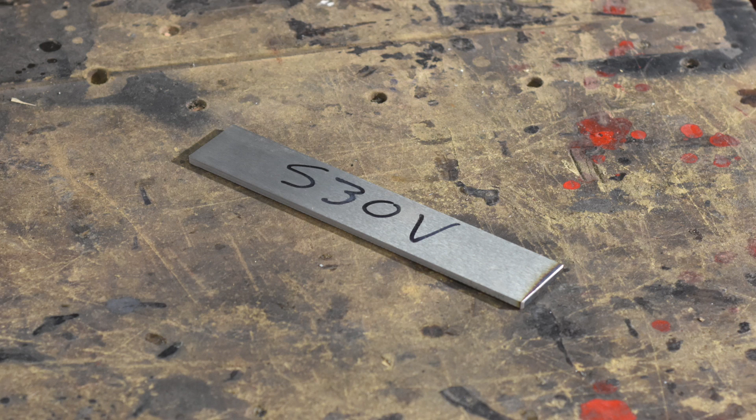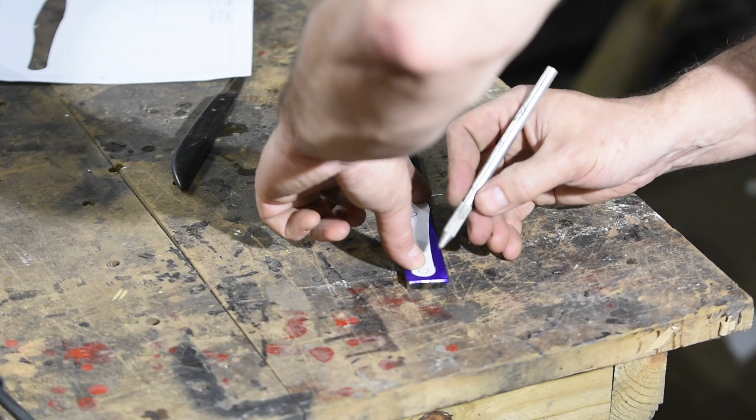For today's project, we'll be using a piece of S30V, a high-performance stainless steel. As with all three blades in this series, the blade started its life as a CAD-CAM design. Now, unlike in the other two cases where the computer design was really just used as a rough template for a handmade blade, in this case, we'll take the CAD file straight to a CNC mill. But let's start with the design itself.

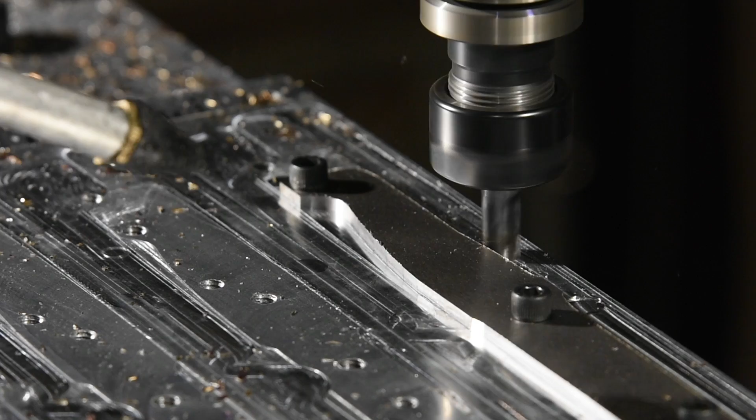I won't go through every single step, but the idea here was to use existing tooling and fixturing that I already use for my Tactics Armory knives to produce a very simple blade with a simple, easy to execute design. Now there's some nuanced aspects to various constraints and so on that I'll skip, but you'll get the basic idea by watching. I began by drawing two circles.

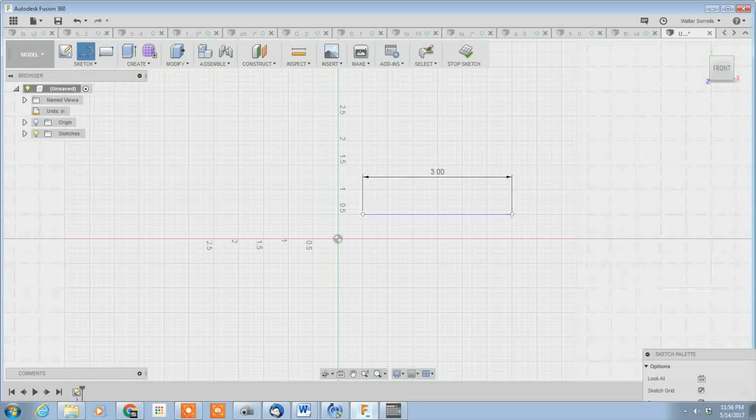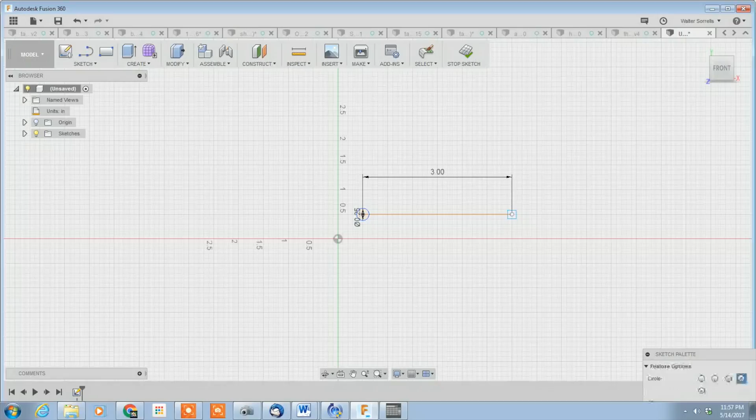There are also some dimensions and various construction lines that I tinkered with, and I won't bore you with all of that. Anyway, these two circles will ultimately be used for the clearance holes to anchor the steel to a pallet on my CNC machine using 1/4-20 screws. I know that I have two anchor points on the pallet that I'm going to be using at precisely 3-inch points, so I'll dimension them at 3 inches along a construction line.

Next, I'll make an offset from that circle to produce the butt of the knife. A couple of 3-point arcs will serve to outline the handle. Additional arcs will complete the blade itself.

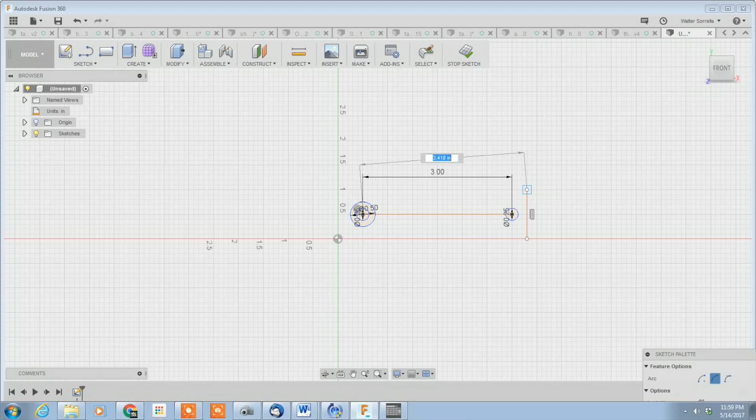For those of you who haven't worked with CNC or might be thinking about it, one of the most interesting challenges is that you're always thinking not only about the widget that you're making, but on a whole host of issues having to do with the way that it's made. How it'll be supported, how it'll be fixtured, what kinds and sizes of tools will be used, and so on.

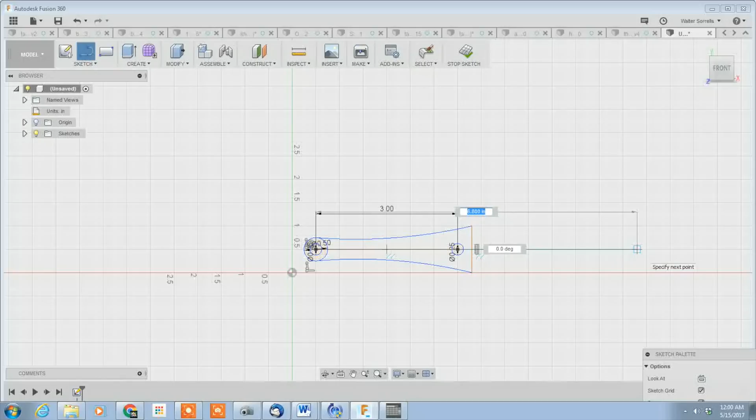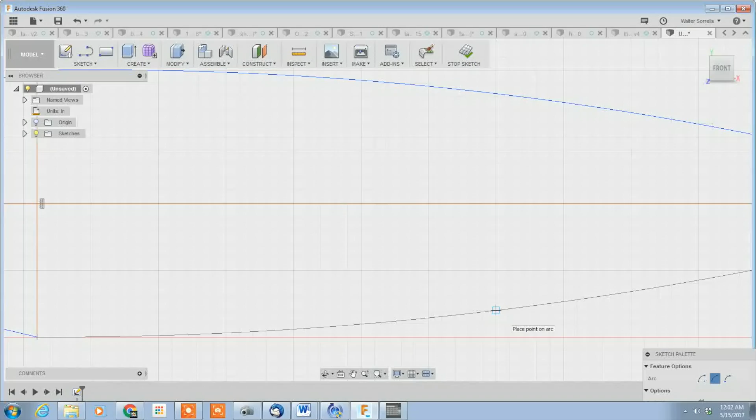Now, because the material is relatively thin on a knife blade, tool chatter is a potentially big problem, meaning that when you run tools around the steel, if it's not properly supported, the material will tend to move and vibrate. This is terrible for tools, messes up tolerances, produces poor surface finish, and so on. It's just really bad. So I want a third anchor point out near the tip to prevent chatter in the blade section.

The first two circles I've made will result in holes that are used to bolt the blade down to the pallet. But where do you put a third hole? You can't just drill right through the blade, right? Well, the answer is to make a tab. There are ways of generating tabs when you start doing the CAM, that is the manufacturing part of this process.

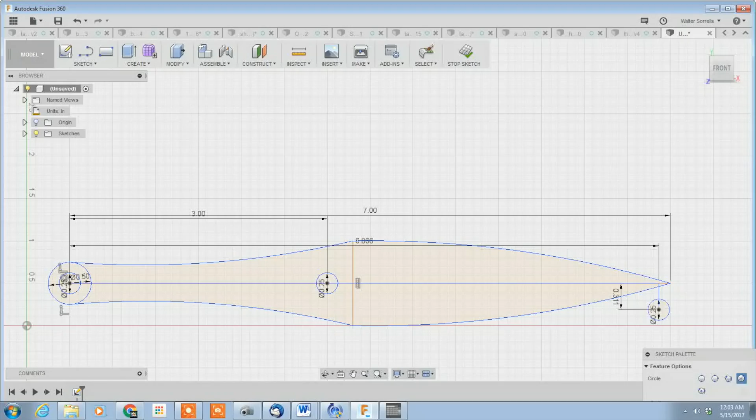But to me, the methods that are built into Fusion 360 are a little bit of a pain to use, and it's not as easy to locate precisely where that tab is going to be as it is if I just design them right into the part from the very beginning. So by just designing the tab into the knife and then grinding it away later, I can control where that tab is down to the 1/1000th of an inch and then ditch it once it's served its purpose.

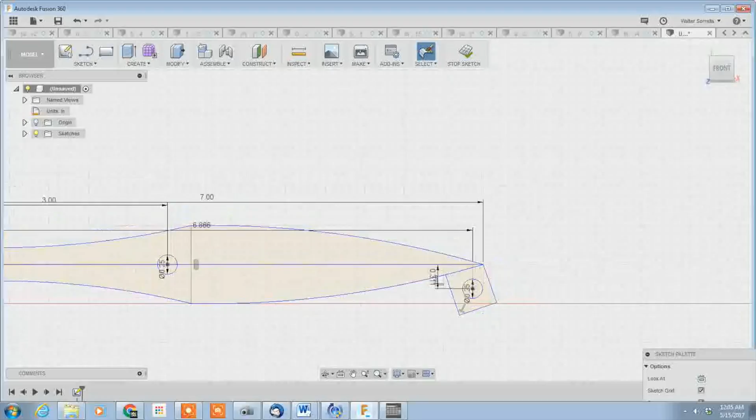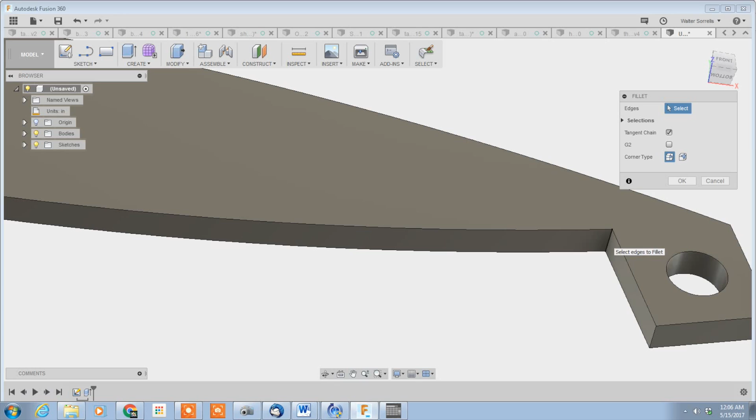Being able to locate it with a great deal of precision is important because, as I said earlier, I'm using an existing fixture that's used for one of my production knives. So the holes are already drilled and I have to adapt my knife to those holes instead of working it the other way around. See, for a one-off blade, I don't want to have to reinvent the wheel and build a bunch of time-consuming fixtures.

So like I said, I've designed the tab right into the part, using construction lines to dimension the bolt hole to the 1/1000th of an inch so that it lies exactly on the knife where it'll be on the pallet that I'm going to screw it down to on the CNC machine.

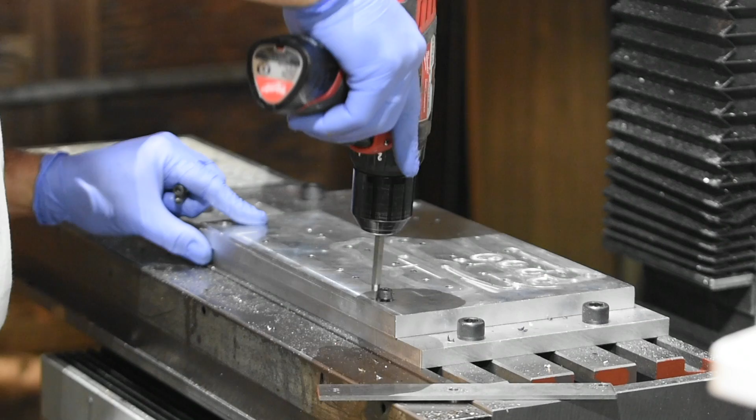Now this fixturing method, where you're basically locating everything based on bolts, wouldn't be precise and repeatable enough for a lot of applications. The reason for this is that you'll have minor deviations in the position of the blade caused by little wiggles between the hole and the screw. But in practice, the amount of wiggle is only in the range of a couple thousandths of an inch. So for this particular application, it works just fine.

If we wanted more precision, we could use high precision locating pins and things of that nature, but that's really overkill for this dopey little knife.

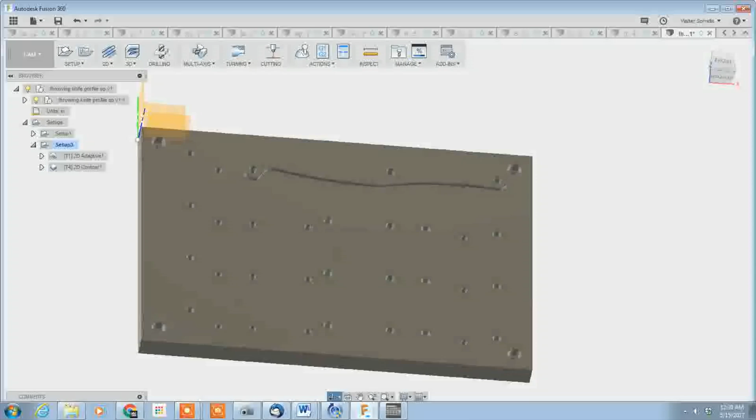Alright, now we've moved on to the CAM or computer-aided manufacturing part of this process. This is where the actual tool paths, literally every move made by each cutting tool involved in making this blade, will be detailed. In this case, we're kind of Frankensteining this blade from an existing setup, so we won't have to detail the way the holes are drilled in the pallet that we're going to be screwing it to. We'll jump right to profiling the blade.

This is a pretty simple process. We'll import the design into the pallet setup, then use joints to align it to the pre-existing bolt holes. Once that setup's done, we'll use a 3/8 inch end mill to rough out the profile. Then a 1/4 inch end mill will take a final cleanup pass around the profile of the blade.

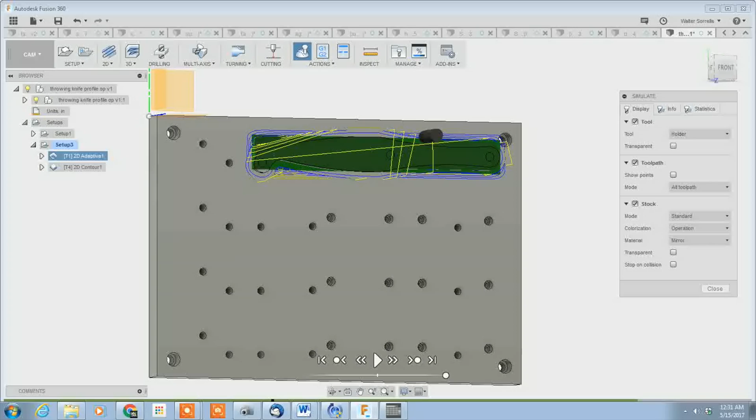I could do lots more things at this point if I wanted. I could chamfer the edges and even mill bevels on the blade itself. But that would create fixturing problems that would take literally days to solve. I love you guys, but I'm not burning 2 or 3 days of work on that. Instead, I'll just bevel the blades on the grinder and save myself a ton of time.

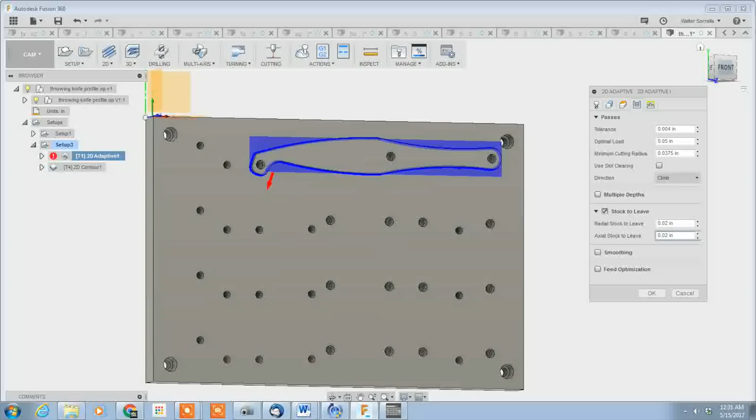Anyway, the next process is to generate G-code. For guys who don't do CNC, this is the set of instructions that will tell the milling machine exactly which cuts the blade makes. I do that by posting the file. That code is then uploaded to the controller of the CNC machine, and we're ready to start cutting steel.

Our first op is drilling, which I do on this little fixture plate. I didn't show this part earlier because I'm actually using a drilling operation from a totally different knife. Anyway, we hit the go button and start drilling.

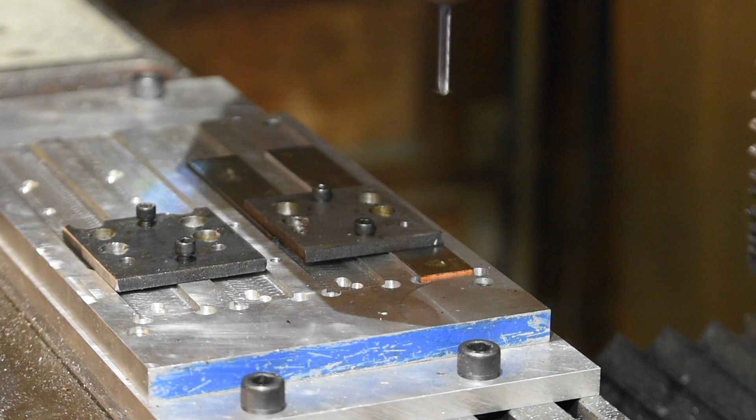Now, of course, I realized later that I made a mistake in not tinkering with the hole drilling operation from the other knife. It ended up putting the holes off center on the blade. It's not a functional issue, but kind of bush league looking. But hey, this is basically a one-off prototype-y kind of thing, and the whole nature of prototypes is that they never come out perfect. That's my story, and I'm sticking to it.

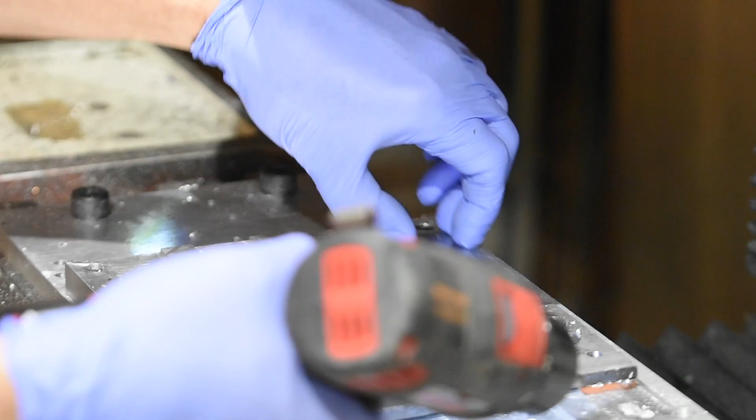In all seriousness, obviously, if this were something that I was making a bunch of copies of or that I was going to be selling, I would sort that out and it'd be quite easy to do, but we're stuck with it now. Alright, so next we'll mill out the profile of the knife.

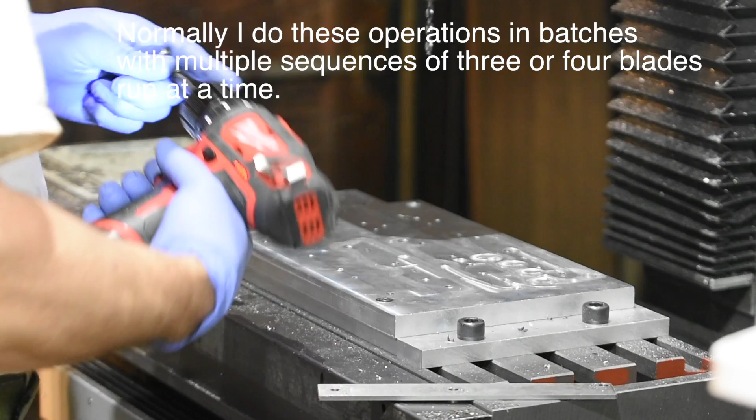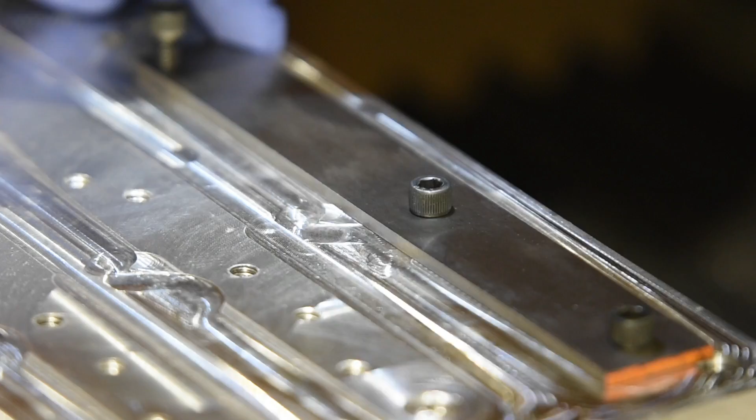Now this is a high carbon vanadium chrome steel, very nasty on cutting tools. For folks who've mostly done milling on aluminum or even on mild steel or high carbon steel, believe you me, this ain't that. You have to be pretty mellow about how hard you push this stuff, especially with a fairly small system like my Tormach.

That said, we can cut stainless tool steel just fine on this system. You just can't go too buck wild on it. For you CNC geeks, I'm running an aluminum titanium nitride coated Lakeshore Carbide 4-flute cutter here. I'm running around a 0.05 inch step over, about 1900 RPM, feeding at 7 inches per minute.

If you haven't used AlTiN coated tools, they're intended to be run hot. They achieve maximum lubricity, which is a fancy word for slipperiness, when run at about 800 degrees Fahrenheit, so you don't want to use coolant on them when cutting steel. I'll just be blowing a little air to clear the chips.

When I run a brand new cutter with this recipe, I tend to get gold colored chips, but as the cutters wear in, which they do pretty darn quickly with this kind of steel, the chips start going blue and then purple and then gray at those same speeds and feeds. In theory, this means the chip is going from around 400 Fahrenheit when it first starts cutting to around 600 or 700 or 800 with those darker colors.

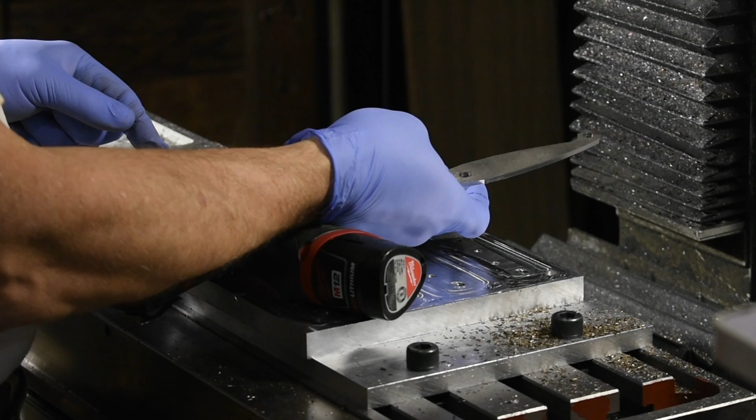We're done now, and here's the blank, ready for the bevels to be ground. So, it's on to the grinder. If you want to see more detail about this part of the process, we'll have a link in the cards here to video number 2 in this series, which goes into more detail about the grinding process. A lot of folks are going to have watched that video too, so I'm not going to repeat it.

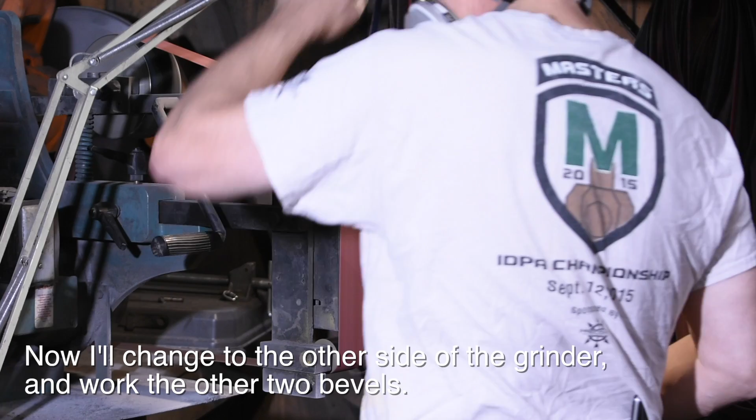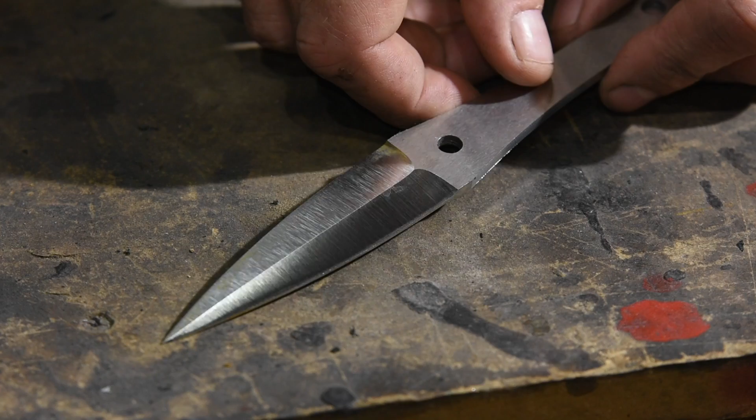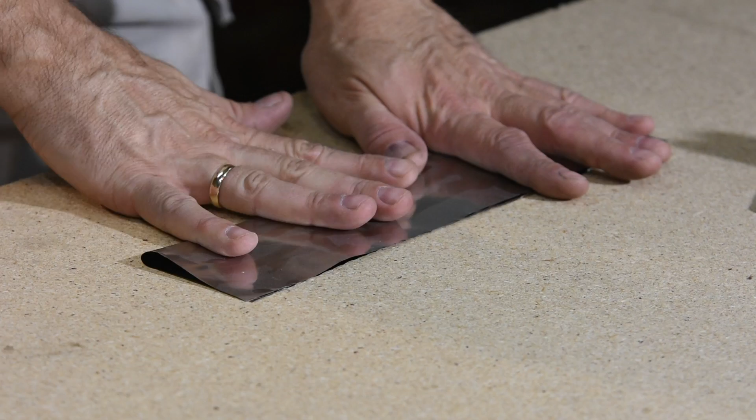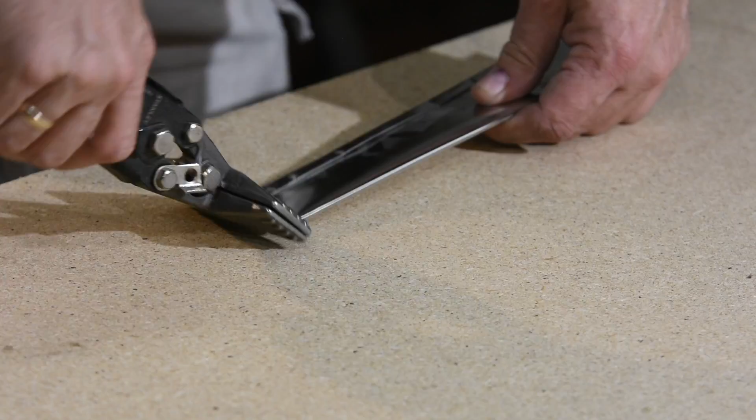So all done, and here we are ready for heat treat. We'll wrap the blade in a pouch of heat treating foil, which will protect the blade from oxygen during heat treating. If you expose the blade to oxygen for the extended period of time that the blade's sitting there in the heat treating oven, it will not only develop scale, which is a giant pain to clean off, but more importantly, it also leaches carbon out of the blade, a process known as decarburization, which can soften the outer portion of the steel and especially the cutting edge, leading to lower performance.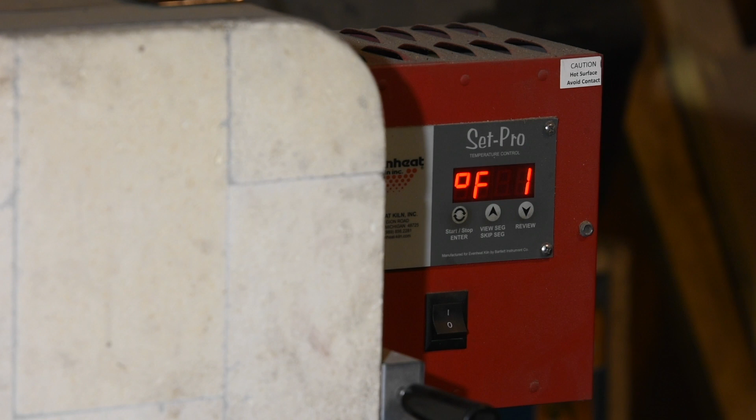So, it's into the heat treating oven for a 30-minute soak at 1900 degrees. There are a lot of different ways of quenching a stainless steel blade, but in this case, we'll use what's known as a plate quench, smashing the blade between a couple of aluminum plates. This is an air hardening steel, so you can just take it out and let it cool in still air or cool in front of a fan or something, and it'll harden nicely. But the advantage of plate quenching is that you can reduce the likelihood of the part warping.

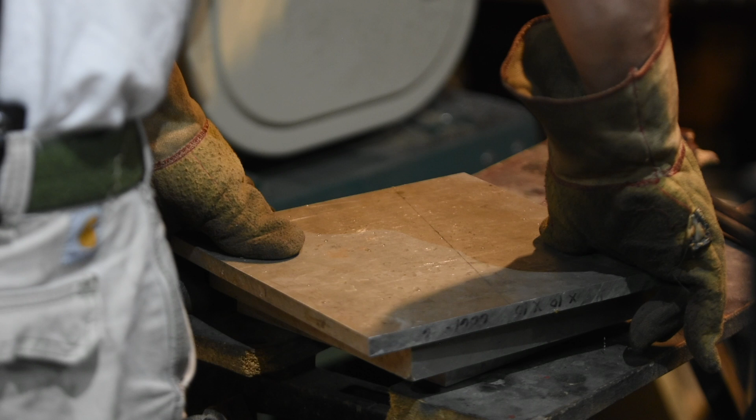On one of my production knives, the process is a little more complicated than I'm showing here, but for a beater like this it works just great. After cooling to the point where you can touch it, the knife goes back into the heat treating oven for 2 cycles of 600 degrees each. This will result in a knife that's fairly hard, but not too brittle. A little cleanup on the grinder, and we're ready to join the carnival.

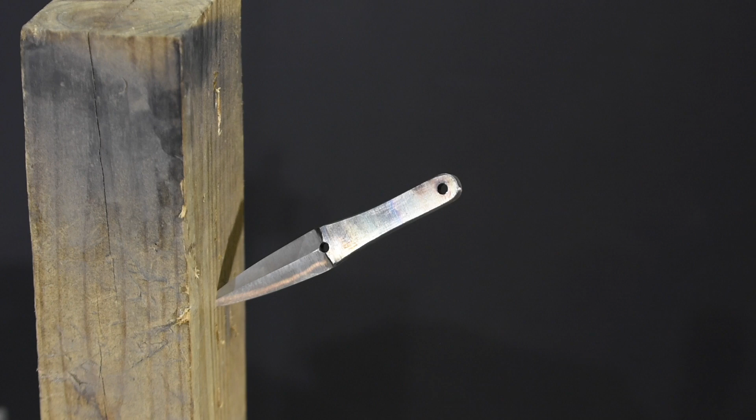Alright, so I just want to say again, I hope you get a chance to watch all 3 of the videos. The whole point of this is, here's an extremely simple design that you can execute in a multitude of different ways and still result in a similar kind of knife. Everybody comes at this with different equipment, different skill sets, and so on. And the point of these 3 videos is to say, hey, look, here's kind of a smorgasbord of approaches that you can use to make a knife, and pick the one that works best for you.